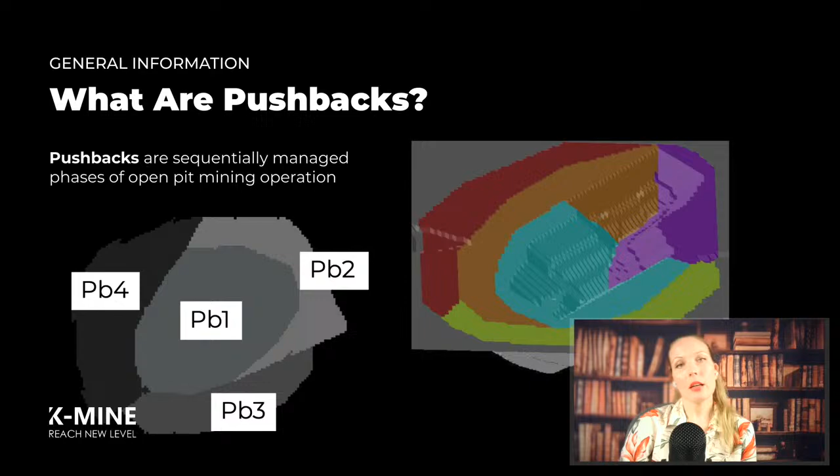Pushbacks allow for managing the intensity of mining across different areas, coordinating efforts over time. A pushback represents a controlled phase of pit development, ideally made up of unique adjacent volumes that can be mined with the current equipment while respecting practical geometric limits. Generally, pushbacks are mined sequentially, and once overburden is removed, equipment shifts to begin stripping in another area, ensuring timely mineral extraction.

So if you're wondering why, and what's the difference—we've been doing this for ages, it's been working fine—let's compare how different mining methods impact operations, intensity, and other factors. First, let's clarify what we mean by conventional mining. This involves progressive pit development where there isn't a clear mining front, but rather multiple mining zones influenced by specific mining conditions. Sometimes there might be a direction to the mining operations, but it wouldn't qualify as pushback due to the mining approach. With pushbacks, a cut is made to a specific width from the pit top and is mined progressively downward until reaching the maximum feasible depth.

Each pushback must extend the pit's depth at its lowest point, giving the entire pit a defined direction in its development. So let's talk about how conventional mining stacks up against using pushback and how these methods impact mining operations.

If you go with conventional mining without pushbacks, you get some nice benefits. For example, you have access to most of the mining faces at the same time, which means you can mix and match minerals to keep up with what the processing plant needs. That's pretty adaptable if things change around you, and you can also adjust production volumes without too much hassle.

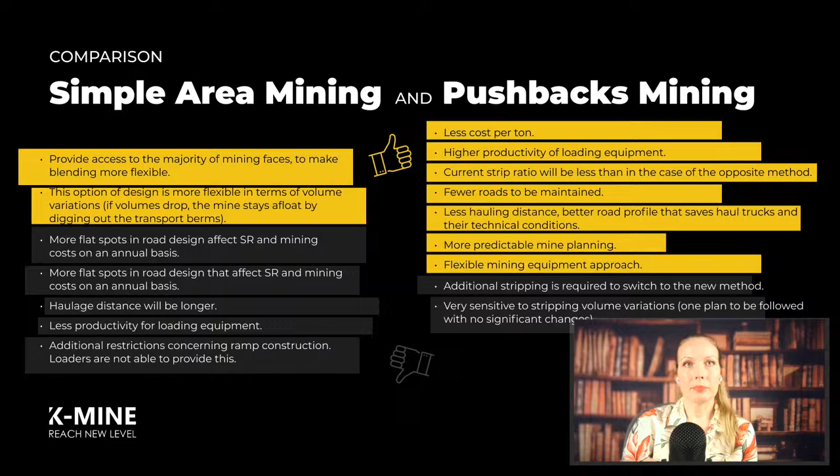So when we talk about pushback, there are some rules you have to follow when you're setting them up and building them out. First of all, each pushback needs to be made of unique connected blocks. This is key for planning pit roads, maintaining safe slope angles on the pit walls, and each new pushback should connect to the previous one, sharing transport links.

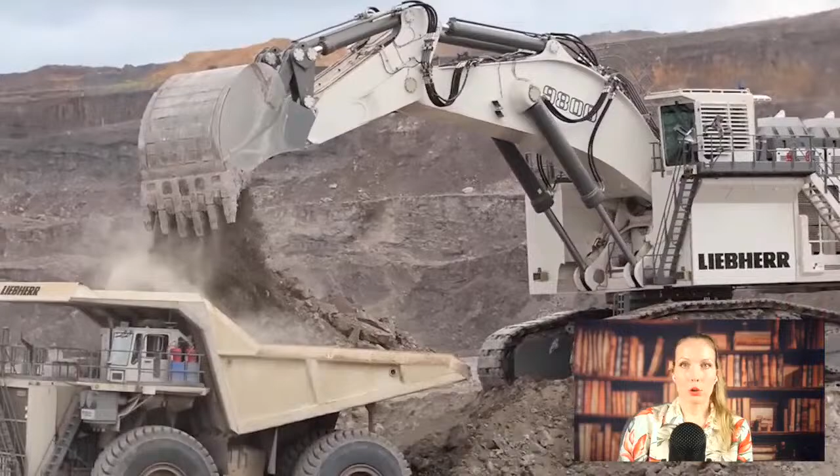Then you got to tailor the pushback to the equipment you're using. Before you even start planning, you need to know exactly what machinery will be in play, from mining to loading and transport. This ensures that your equipment can operate at its best within the pushback.

Third, each pushback should have enough of the right quality minerals to keep the processing plant running while you're opening up the next pushback. These rules also bring some limitations. Your pushback has to be manageable with the equipment you have. It needs to connect properly with neighboring pushbacks, and it must meet the plant's needs in terms of both quality and quantity while it's being mined out.

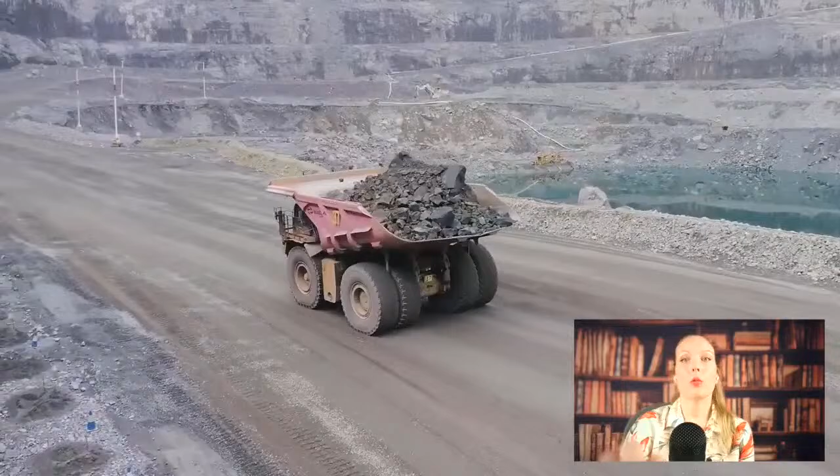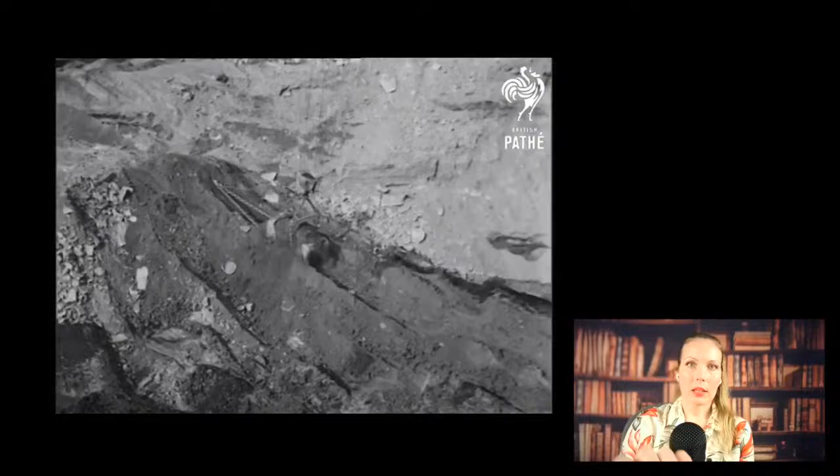So let's take a little trip back in time to see where pushbacks in open mining just came from. The idea of pushbacks really took off with the growth of mine development planning, especially in those massive quarries where managing resources efficiently and cutting costs was key. In the early days, it all started because people realized they needed a smarter way to use space in mine development. You start seeing the term pushbacks in technical reports and research around the 40s and 50s, when quarries were getting bigger and there was a push to optimize everything.

Then in the 60s and 70s, pushbacks became more popular thanks to new computer technologies, and this allowed for modeling different planning scenarios considering all sorts of variables like geology, mining conditions, and how much you're producing. This was also when powerful software started popping up, which really helped with planning, including how to develop pushbacks.

It was around this time when we started using mathematical models to fine-tune pit planning. Understanding how materials behave and being able to predict it accurately meant that pushbacks became a go-to method for big mining companies like Rio Tinto and BHP, who were at the forefront of adopting these technologies.

Fast forward to now, and pushbacks are all about high tech and complexity. With the advent of computer technology and geographic information systems, we can plan even with more precision and efficiency.

So the evolution of pushbacks has gone hand in hand with advancement of mining engineering, tech, and computing, making it an essential part of strategic planning in the mining industry today. Let's check out some examples that really make a case for using pushbacks in mining.

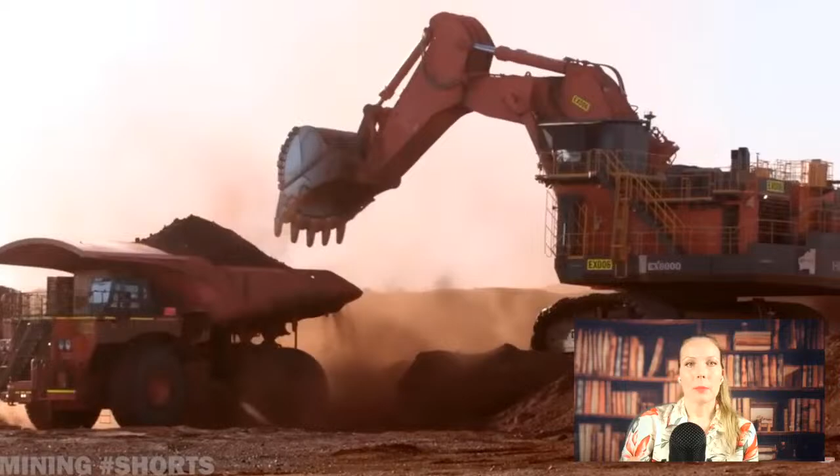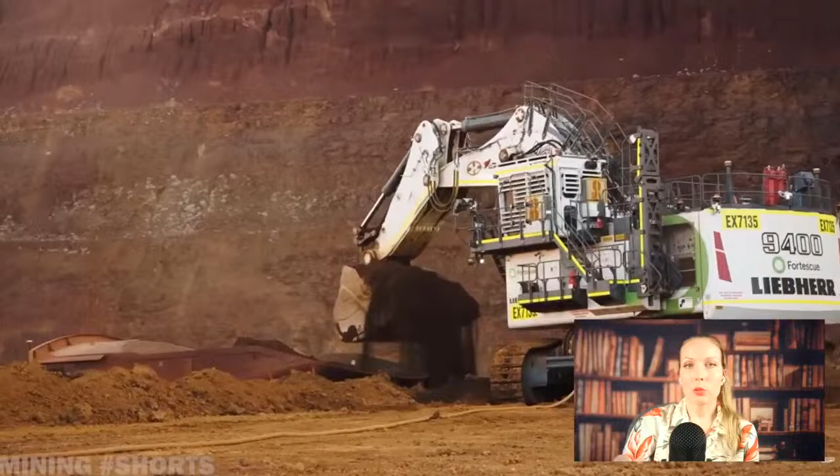BHP, another giant in mining, employs what they call the wave method in the Australian iron ore mines, especially in Western Australia. Using pushbacks here has allowed them to get the most out of the mines by mining in stages, each optimized for economic efficiency. This approach has lowered energy costs, made material transportation more efficient, decreased harmful emissions, and given them a stable production rate, reducing the risk of big financial hits if market prices for metal products swing. Advanced computer models have helped them forecast production and cost more accurately, which has been great for their bottom line.

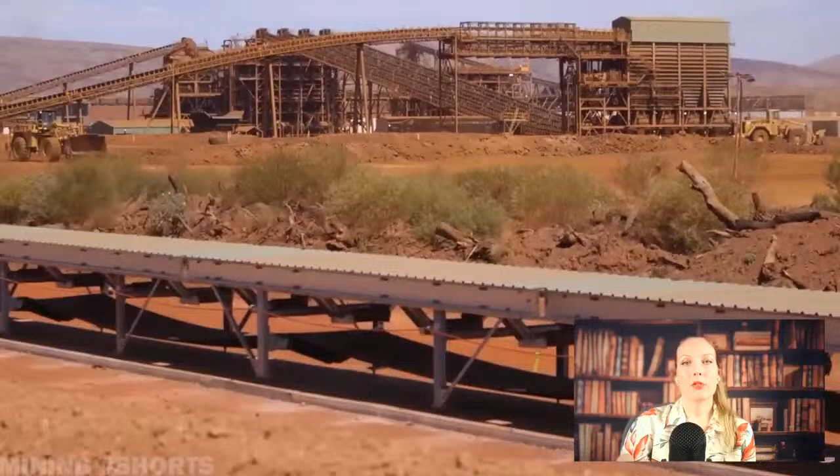These cases show how pushbacks can transform mining operations, making them more efficient, cost-effective, and environmentally friendly.

And now joining us, a mining consultant and a professor at University of Mines and Technology in Ghana, and also assistant professor at Queen's University in Canada, Dr. Bright Afum. Bright, nice to see you, and happy that you found the time to join us. Yes, thank you very much. Nice to see you again, Anya.

So talking about pushbacks and how effective they are, what do you think about it in your personal work, and what do you think are the key elements of effective pushback?

So in talking about pushback, I think we should also mention cutback. Pushback and cutback are actually different, but we use them interchangeably. Pushback refers to expanding the pit, getting more areas outside the pit into the pit, but following or using the already existing peripheral parameters like the bench height, the bench width. You maintain everything and you push it back. But in cutback, it's the same thing, but you have the flexibility of changing the parameters, and therefore the name applies as cutback, where the parameters change. If not, it's pushback. Because I teach students, I'm always particular about the terminologies.

Now let's see how pushbacks are made in K-Mine software. We'll begin with the easiest way, automatic construction, where the computer does the heavy lifting for you. We've embedded some unique features into our algorithm to find the best pushbacks, considering several extra parameters.

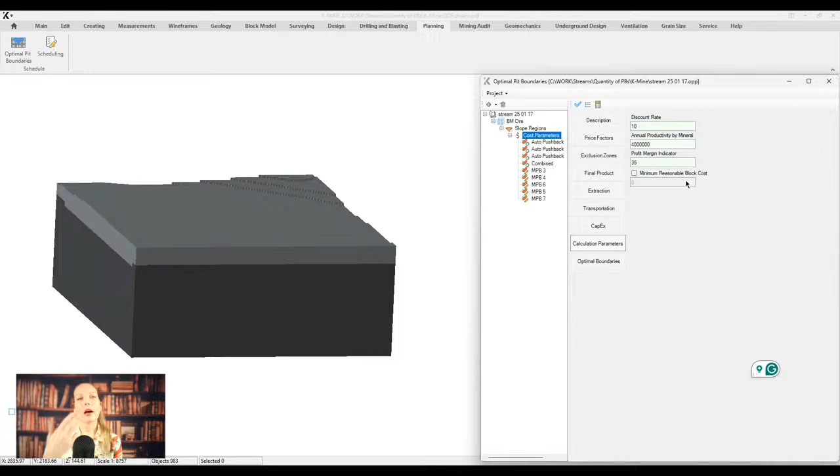First, you need to calculate a project for the ideal pit outline. Based on that, we can generate as many pushbacks as needed. For example, let's say we've made a project and plugged in various data like cut-off grade, extraction rates, how stable the pit is, and the mining costs. After doing the math, we get a set of final contours adjusted by what we call the price adjustment coefficient.

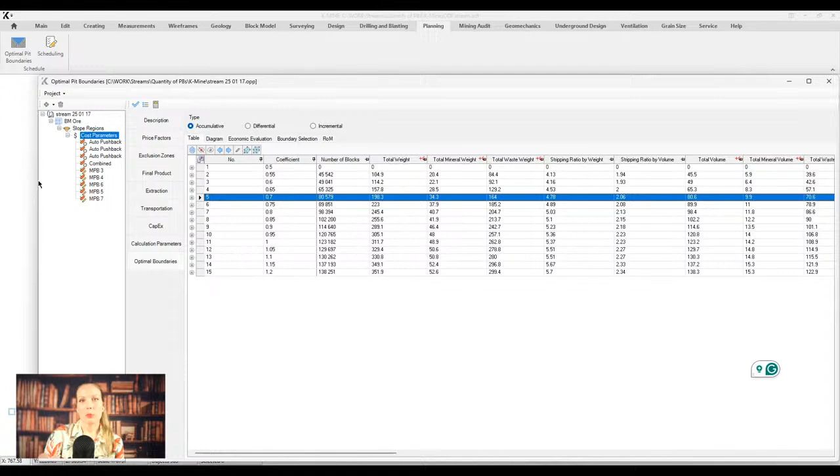The report is pretty thorough, painting a near real picture of mining operations with plenty of indicators and graphs for a first look. Each set of these block results can be viewed on its own, allowing you to explore how volumes grow as the product price goes up. This helps in deciding the pushback development sequence, aiming to maximize NPV. For each contour, you can create a detailed wireframe, track excavation with cross-sections, and integrate geological data.

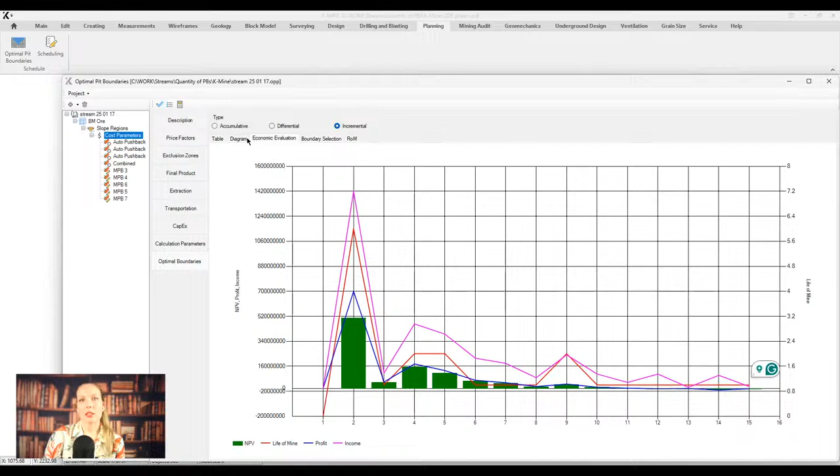For a quick analysis, we've got preset graphs that show the economic side, development timeline, and rock mass removal stats for both individual and cumulative contours. You can check this info in different ways to get a full picture. We recommend using a coefficient of 0.95 moving forward.

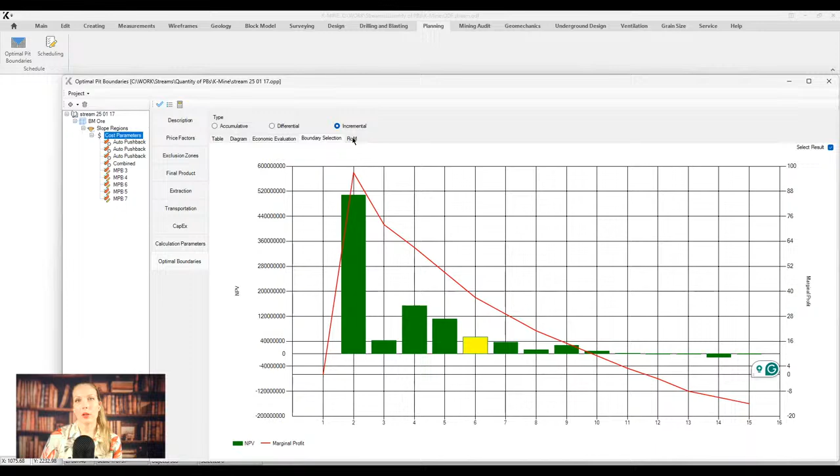In our plugin, we've set up key parameters for pushbacks like price adjustment coefficient, how many pushbacks you want, the width of the working area, minimum pushback area at both the top and bottom, plus some other useful ones. You can also set geometric and elevational limits for automatic pushbacks or direct them, but we'll discuss combined pushbacks later. Every setting is customizable for each pushback.

So now let's talk about setting up the numbers. Each pushback can have its own extraction volume and priority for different metrics. You can also add capital expenditure data to the pushbacks for a more detailed financial model. As a result, we get sets of blocks that match your desired income to varying degrees.

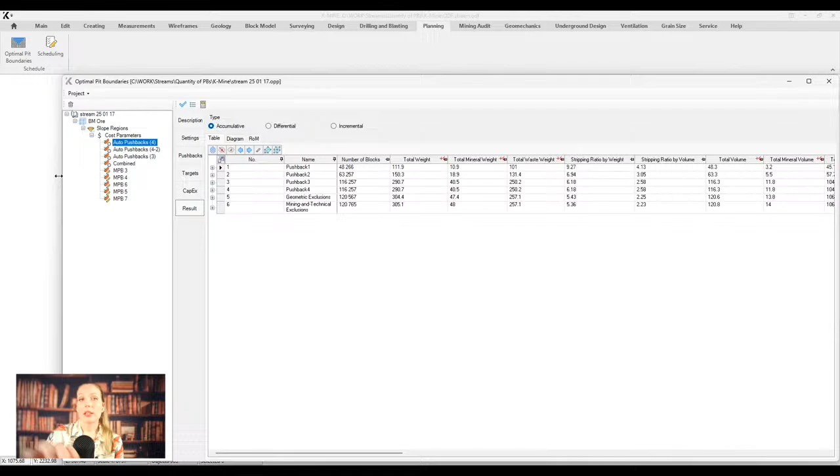You can create as many automatic pushback tabs as you need, allowing you to try different scenarios and pick the best one for further planning. You can adjust target parameters, tech specs, number of pushbacks, and all sorts of combinations. All this can be evaluated right here without needing other software. The results can then be saved in a block model for use in other parts of the software.

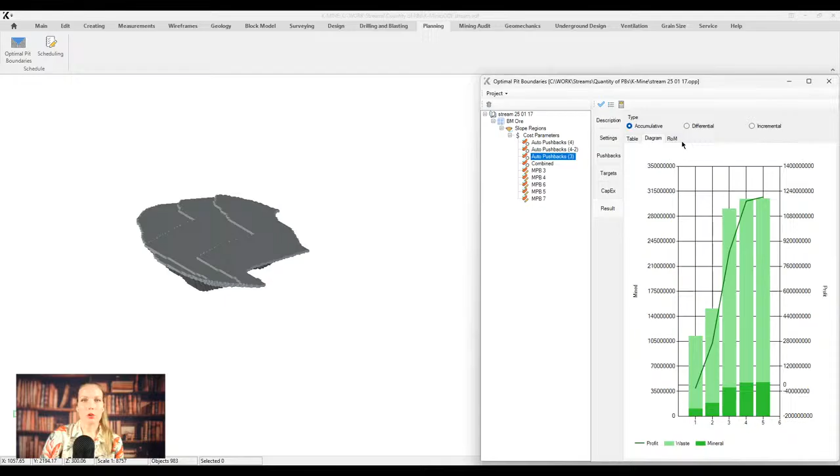So let's talk about the hands-on way of creating pushbacks. The big difference here is that the engineer has to think it through and set limits for pushbacks. Many engineers start with the automatic method to see the patterns, then switch to manual for crafting the most practical pushback shapes.

First, you decide on the coefficient you want to work with, how many pushbacks you're aiming for, and what to do with any leftover blocks. You start by choosing which layer will give you the instructions for pushback creation, and here you can pick whether to use polylines, surfaces, or solids. You define how constraints will apply inside or outside a contour or solid, above or below the topography. All these constraints can serve to include or exclude zones, and you can mix several if you need it.

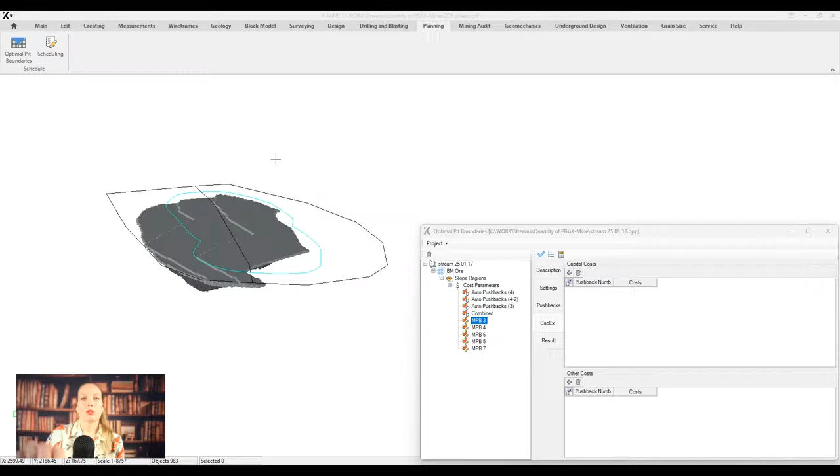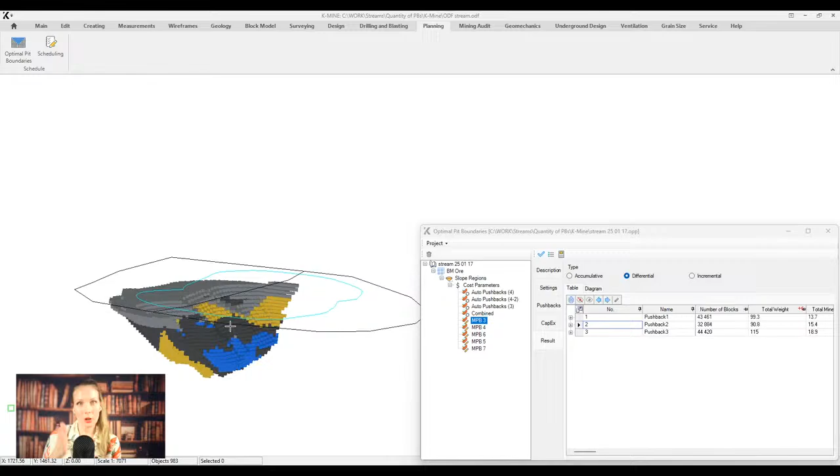Plus, you can decide whether to consider the connections between blocks calculated for angles or ignore them, which would include all blocks within the constraints. You set it up for each pushback. For instance, we've used polylines for all of our manual pushbacks. It's fine if the lines cross over each other, blocks won't count it twice, but if you're a perfectionist, you can make each new contour touch the last one, and that works too.

So let's check out what we've got. The first pushback matches the contour exactly. The second extends from the west and adds depth because we're considering block connections. The third from the east is an extension of the first at the top and deepens the previous two. The working areas at the top are exactly where we set them.

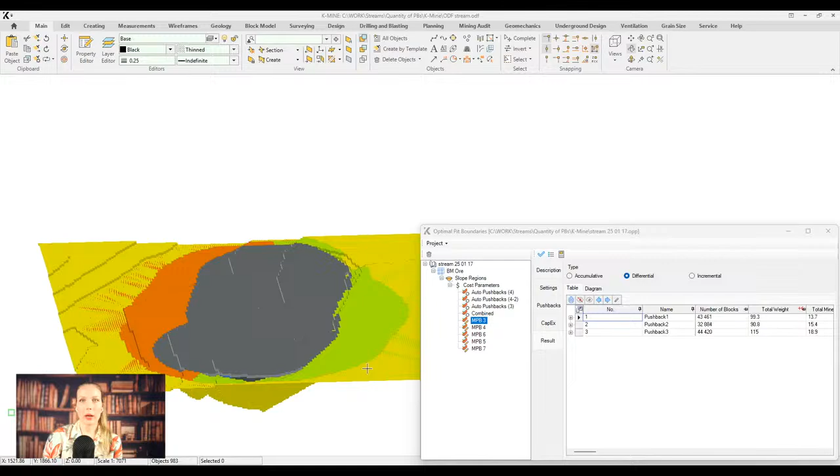Let's look at the frames resulting from pushback construction. Displaying them from smallest to largest shows the mining sequence based on our pushback designs. Just like with final contours for pushbacks, you can explore graphs and detailed tables, and notice how we've aimed for each pushback to contain nearly the same amount of ore. This is something you can achieve with several tries, even when doing pushbacks manually.

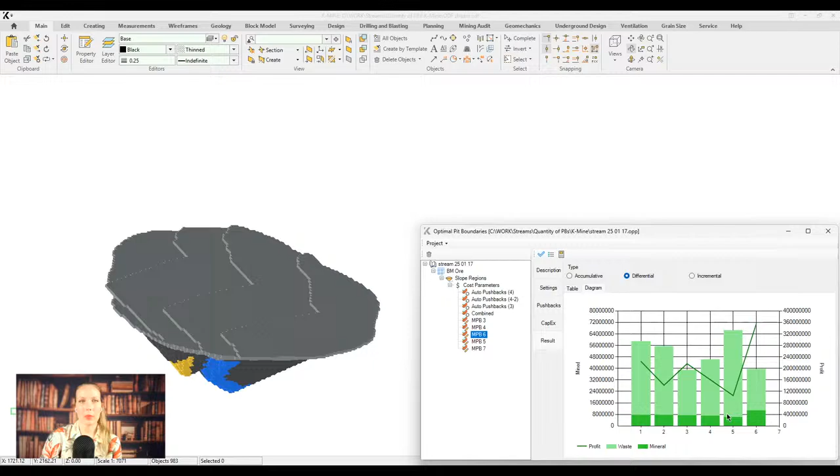We won't go into each detail, but let's quickly see how these pushbacks relate to each other. The ore quantity is kept consistent, and each pushback follows the last. It's interesting to note that with more pushbacks, the first one gets smaller, speeding up the initial ore extraction, which is crucial at the project start.

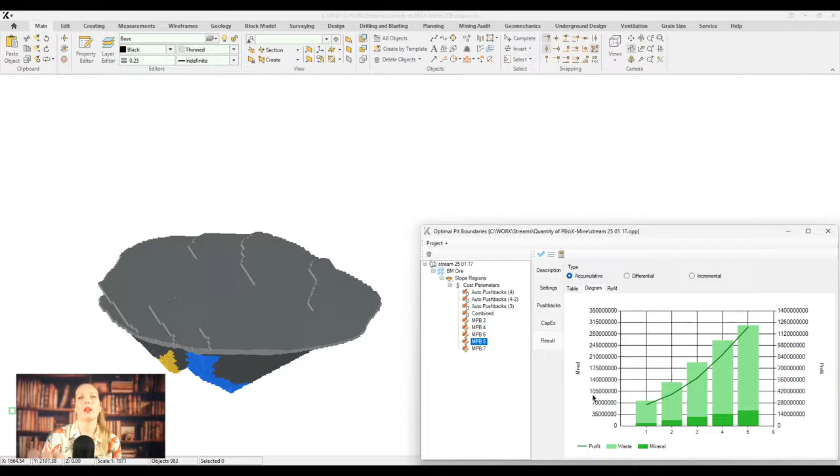For example, now we're looking at the project with 7 pushbacks. The first pushback is at the richest part of the deposit. Then the development heads south, expanding west and east over time. Each pushback is a unique set of blocks adjacent in time.

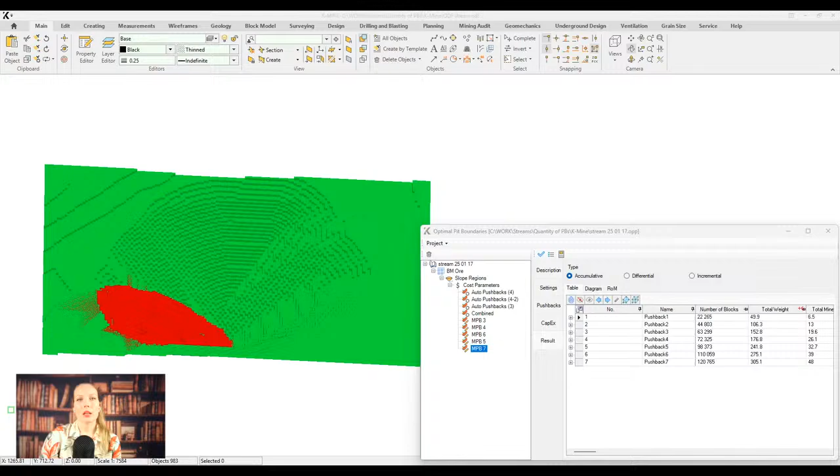I should mention how user-friendly this plugin is. Strategic planning isn't easy, so we've tried to make it as straightforward as possible. And you see, with minimal settings, you get highly flexible and customizable outcomes. It's all step-by-step, making it hard to get lost.

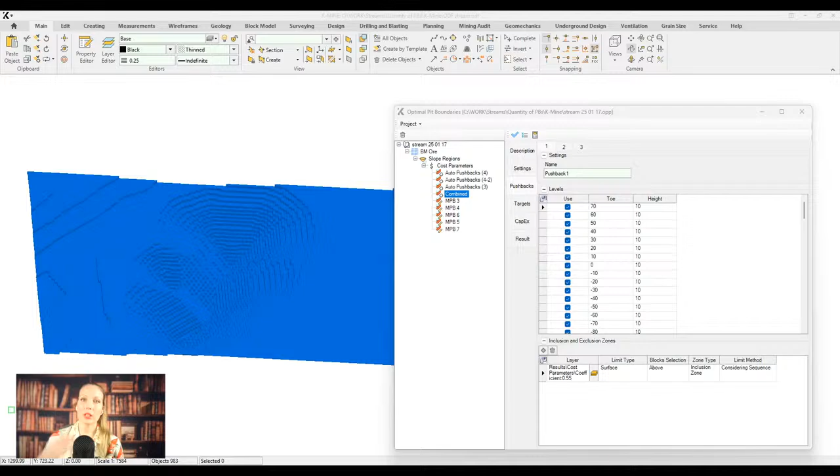Wrapping up how to create pushbacks in K-Mine, it's worth noting that besides fully automatic and manual methods, there is this hybrid approach that Bright was talking about. It's like auto mode, but with some manual tweaking. So you start an automatic pushback and then apply one, two, three, or as many restrictions as you need to refine your pushbacks. This gives you maximum flexibility and customization in the process.

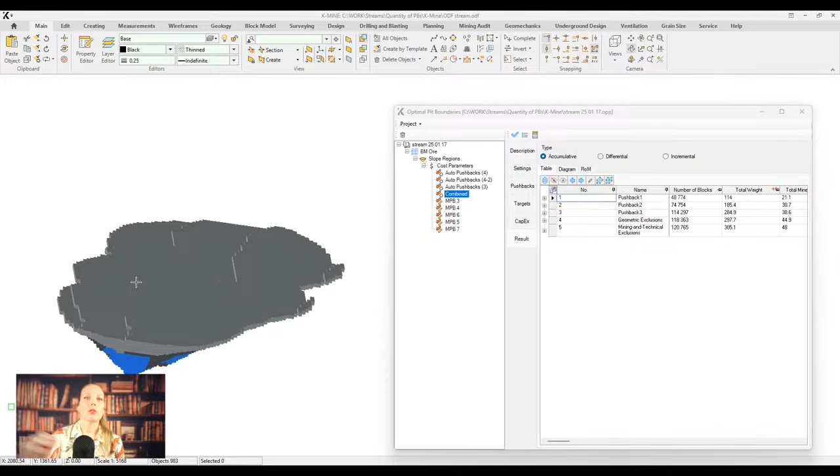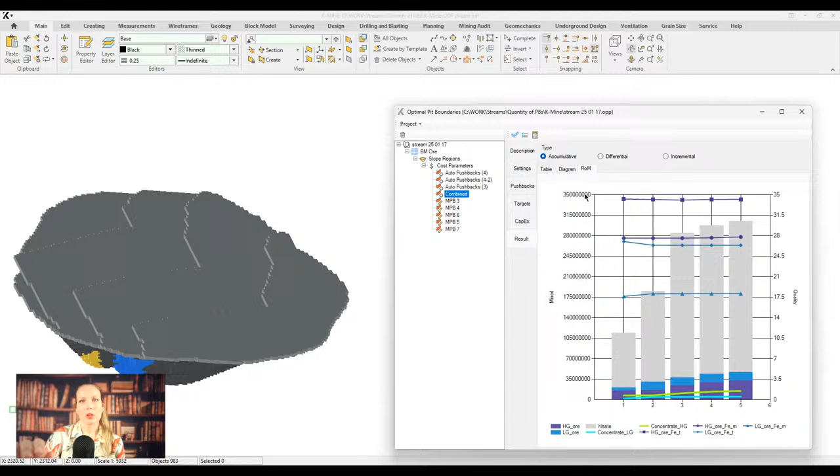For example, within the pushback restrictions, you might specify one of the wireframes that show the optimization calculation result. Then you set the target parameters for finding all subsequent pushbacks, and the calculation kicks off once you start building the second pushback, with the first one being set according to your restrictions. So you see that out of 3 pushbacks, 2 were automatically generated and 1 was manually set using wireframe. This approach is great if you want to know exactly how you want to begin, but there are still things to figure out for the next steps.

And the icing on the cake when creating pushback is definitely the dynamic design plugin that is part of our design module. If you're after the most realistic plan, your calendar schedule should include pushbacks that you design.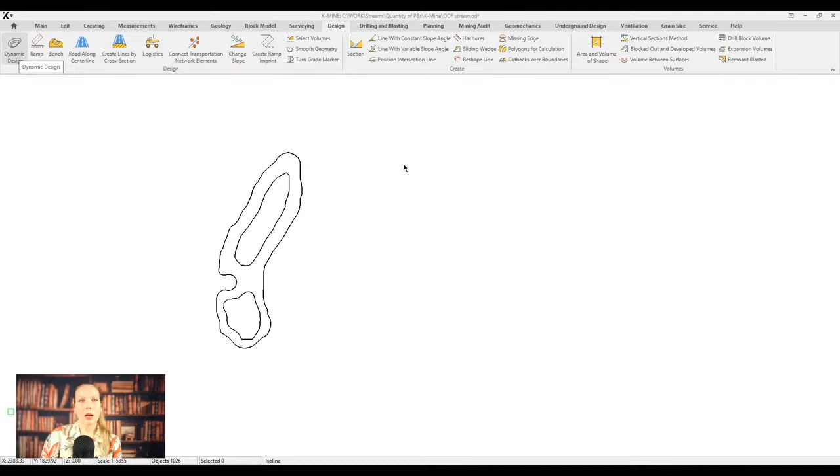Now let's see how to make a pushback project using just a wireframe. First, draw a contour where you want to get ISO lines aligned with the level list. Use the create ISO objects command to generate ISO lines you need. Then pick out the lines you want to work with. Further, in our case, it should be lower and unique, not repeating the previous elevation.

Smooth them out for easier work, and then we move to the fun part. We make a list of levels, which is super easy with automatic filling, and you just need to know your pit specifications. Then we decide which baselines belong to which level. If a line isn't at its assigned level, we project it onto that level. Then we start building the edges.

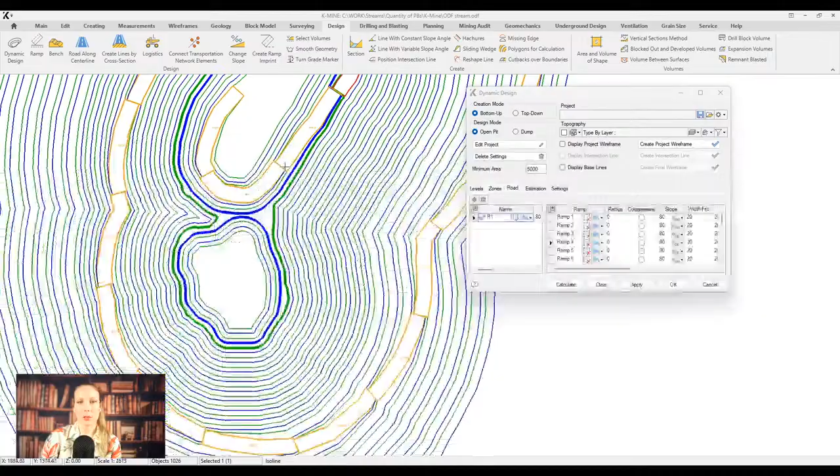We add one ramp, then another, turns, connections, and so on to make sure every part of the pit is accessible. Each section of the project must be mineable. This must be ensured at the design stage of the final pit contour, and all approaching roads must be interconnected to ensure flexibility in the transportation of materials.

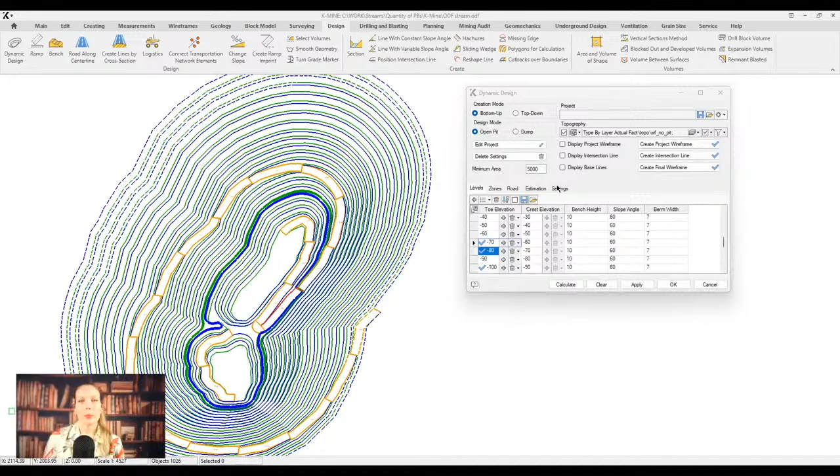Then we introduce the topography into the project and recalculate. This shows us which lines are above ground level, which is crucial because our project must intersect with the topography to work correctly. The plugin has various visualization tools to make this process as clear as possible.

Once everything is set and looks good, we construct the final wireframe. This combines two wireframes, the project and the added initial topography. In just 2 minutes, you can have a project for the final pit's contour, pushback, and other pit elements. Sure, sometimes you'll need more time, but it's much faster than manually designing bench by bench.

And this plugin isn't just for quarries, you can use it for designing dumps too.

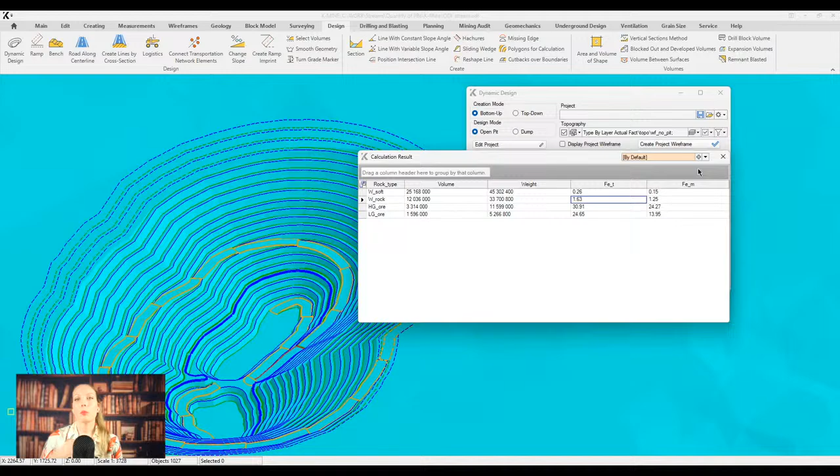So to wrap up, here's a sneak peek for the next update. Our dynamic design model now includes volume calculation functionality done in the most user-friendly and quick way possible. And you can calculate volumes considering level lists, which make document preparation just a breeze. Plus, we'll soon add the ability to visualize the part of the block model that's being calculated.

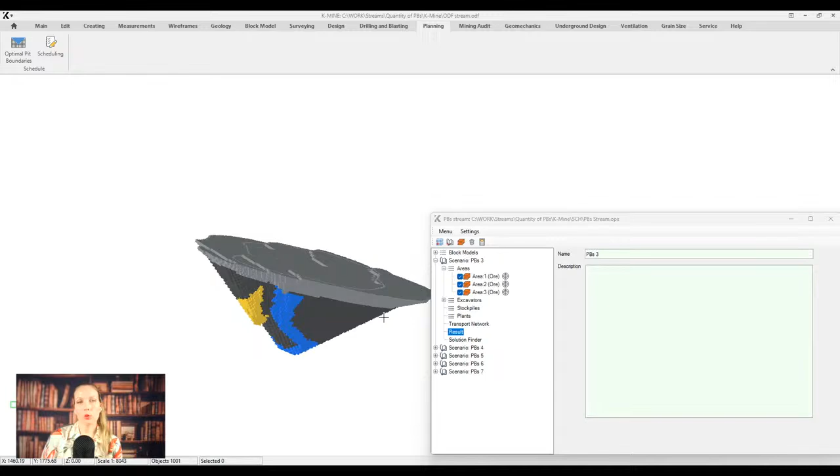So let's dive into calendar planning. First of all, our schedule model is great for long-term, mid-term, or short-term planning. Its strength is in how easy it is to use and how much you can customize it. The plugin lets you calculate mining sequences either automatically or by hand.

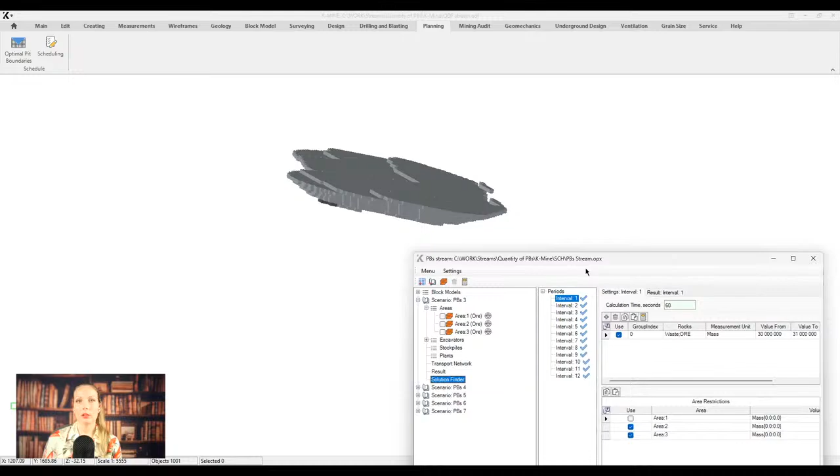We've set up 5 scenarios with different numbers of pushbacks. To keep it real, I'll say up front that these calendar plans aren't perfect, and that's the point, to show what actually happens with different pushback counts. All site parameters are the same across all scenarios to avoid skewing the results.

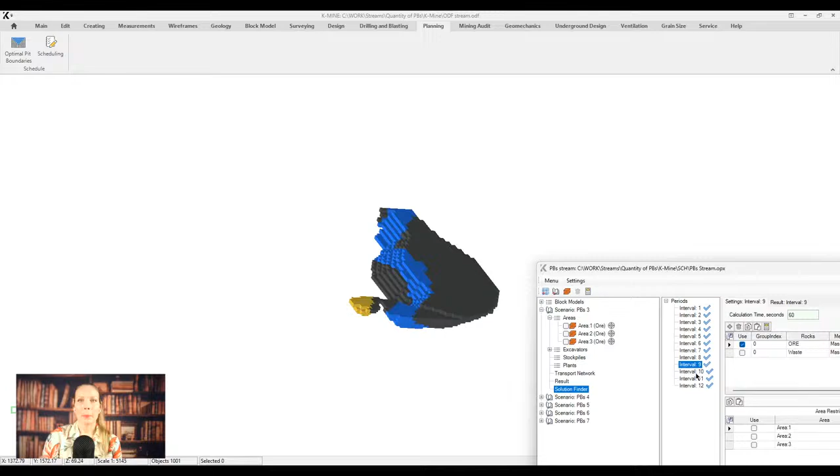And to achieve our goal, it's enough to run the calendar plans in auto mode. The target for ore is constant, but overburden varies because of pushback size differences. We've set a hypothetical pit productivity limit of 30 million tons of rock mass per year. For ore, we're looking at 7.2 million tons annually over 12 years of operation. Once calculated, we get sets of blocks showing the mining schedule over the development method.

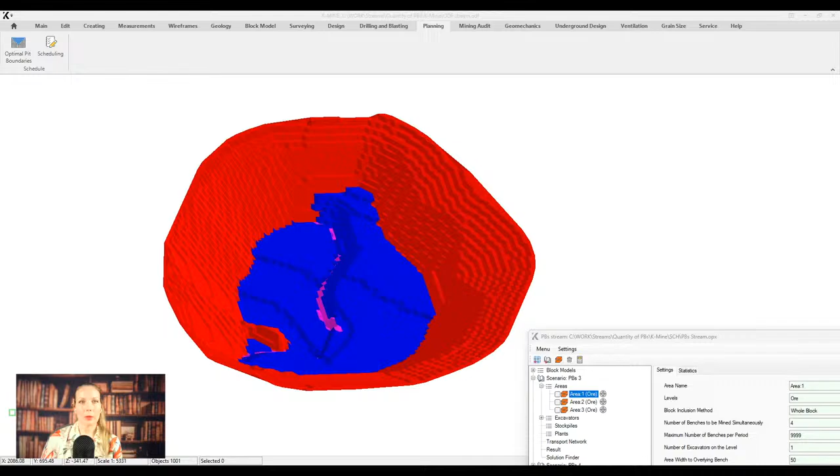Towards the end, we'll lower production to reflect a more realistic scenario. We suggest using wireframes for outputs similar to pushbacks, where you can load and display them sequentially to see the development timeline. The core of planning here is to open one pushback, mine it, and then move on to the next at the right time.

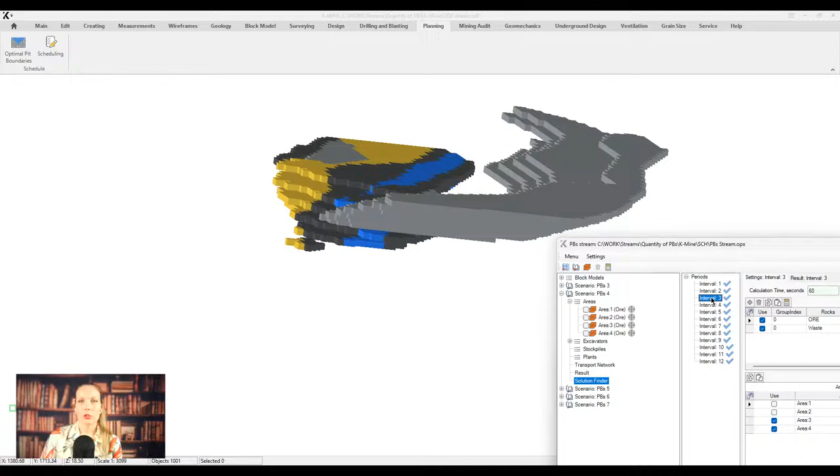So let's look at the results for a scenario with 4 pushbacks. Just looking at the extraction blocks won't give us much insight, so we'll soon switch to a more detailed table analysis. So for a quick example, here's a manual calculation.

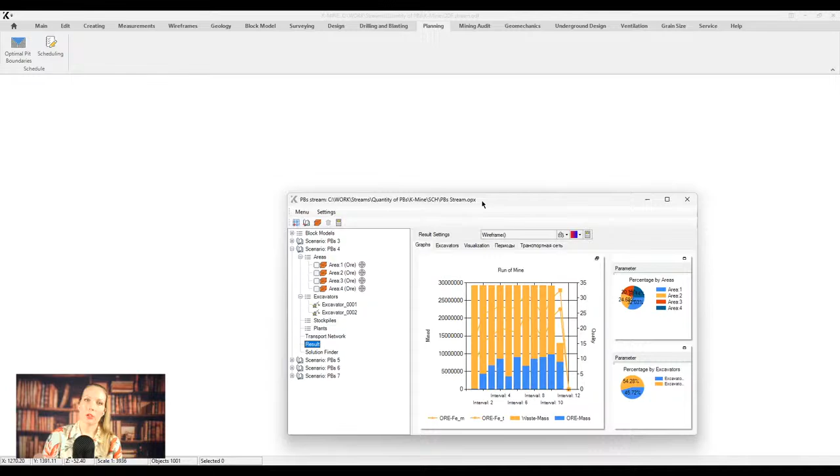We're using 2 excavators. One stays on a site until it's fully mined out before moving, while the other shifts in a bit earlier to set up the next work front.

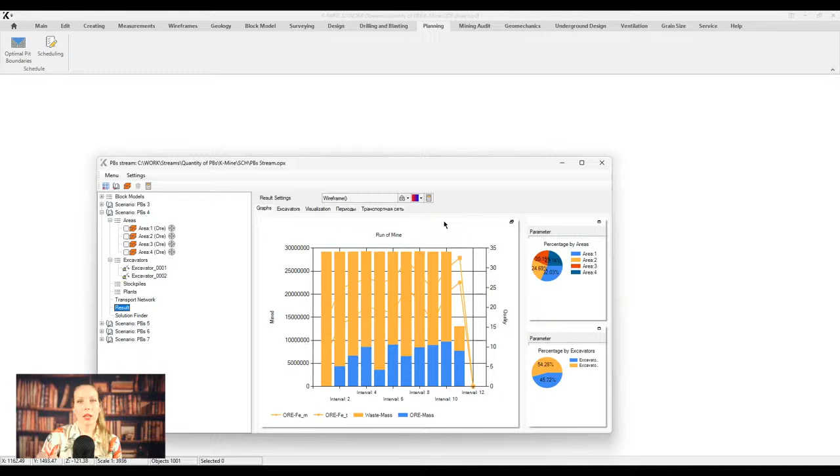After manual calculation, we've prepped schedules to help make further planning decisions. And with manual calculations, you can monitor where the mining phase is each day of your plan, regardless of the planning intervals. Manual planning also opens up additional features like calculating the transport distances for rock mass.

So now let's get into analyzing the data from our planning process. The key takeaway here is that the fewer the pushbacks, the harder it is to reach the ore because you're dealing with a lot more overburden. Sure, you can smooth out the volumes over time and start on the next pushback sooner, but with 3 pushbacks, we see some big spikes in overburden that might not be achievable, because the ore targets are met only from the 4th interval.

With all that overburden early, there is a dip in the net present value, and we used economic indicators similar to those in our deposit optimization project.

So with 4 pushbacks, there is still some excess, and there are spikes, but the spikes are not as high and the NPV improves a bit. The schedule starts to look more doable, suggesting that with more time we can average out the workload.

When we plan with 5 pushbacks, the spikes are even less pronounced. The NPV is higher, and everything seems to be going according to plan. Likely by moving some overburden earlier, we can tackle these issues.

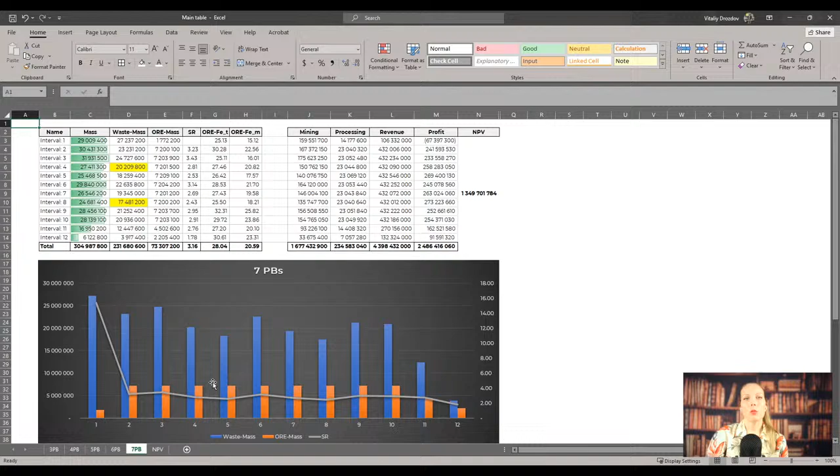When we have 7 pushbacks, the overburden volumes are pretty stable, no big swings, since each pushback is smaller with more of them. It looks promising with the highest NPV, but the real-world feasibility might be a different story, more related to pushback design.

Finally, we look at the graph focusing on NPV, which clearly reflects the economic impact of long-term planning. As expected, fewer pushbacks mean a lower NPV, and more pushbacks mean a higher one, and we've discussed why this happens. It's also worth noting that adding 1 more pushback after the 6 doesn't significantly affect the NPV, but adds complexity to the design, possibly making it unfeasible.

So considering all factors, it seems 6 pushbacks is the sweet spot for these conditions. If not possible, 5 pushbacks could work with extra focus on early development stages.

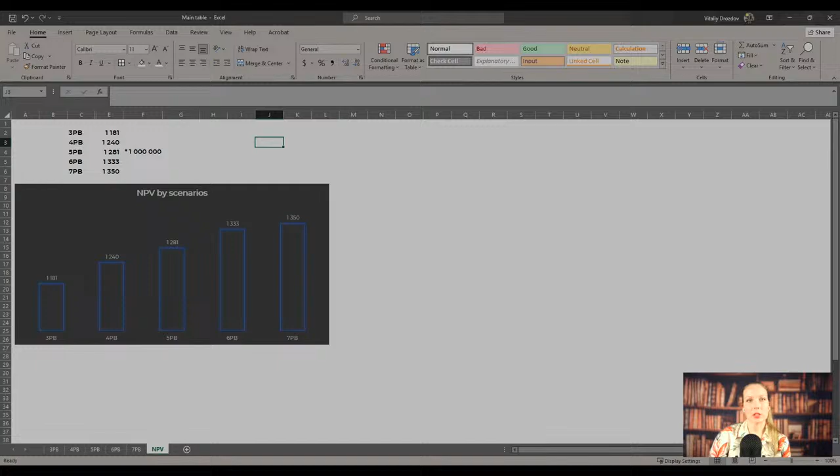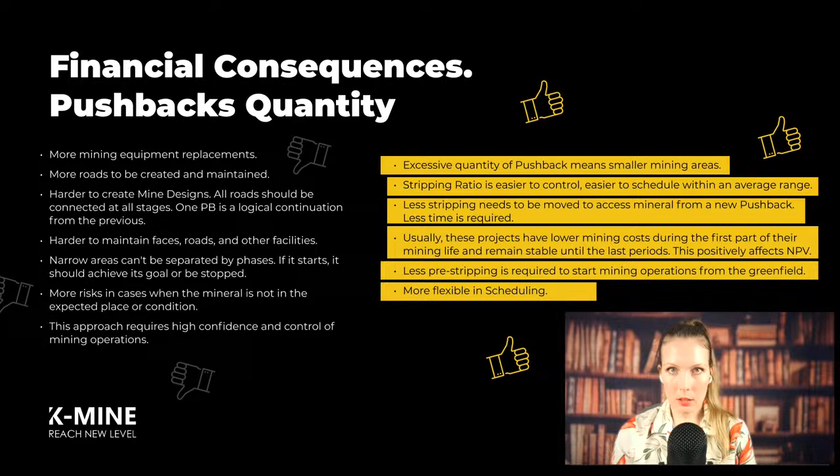Here's another slide worth tuning into for the streams. We've tried to sum up the key points about what happens when you have too many pushbacks, although our analysis shows that more pushbacks can be beneficial. What's good for a higher number of pushbacks is bad for a fewer number of pushbacks, and vice versa.

So here's the deal. Smaller pushbacks get worked through quicker, leading to more excavator moves, which can reduce potential productivity. More roads mean higher construction costs and more time spent. Another big issue is that with smaller pushbacks, you might run into unexpected problems like stability issues or geological surprises, which could halt the process and hurt profitability for a while. Narrow pushbacks mean higher risks.

On the positive side, it's easier to plan and execute mining with more pushbacks, and the relatively smaller overburden allows for working on multiple pushbacks at once if needed. Projects with more pushbacks tend to be more economically attractive, and each point we've discussed has an impact whether on the economy or on the risk of executing the plan.

So what affects the size of a pushback? First of all, it's the size of the deposit. The bigger it is, the larger you can make your pushbacks.

Then there is the size of your mining and transport equipment. It's wise to make the pushback width a multiple of several working areas of the equipment you'll use. Of course, you've got to consider the stripping ratio and how much mineral of the right quality you need. The amount of exposed mineral should keep the plant running smoothly and give you time to open up the next section.

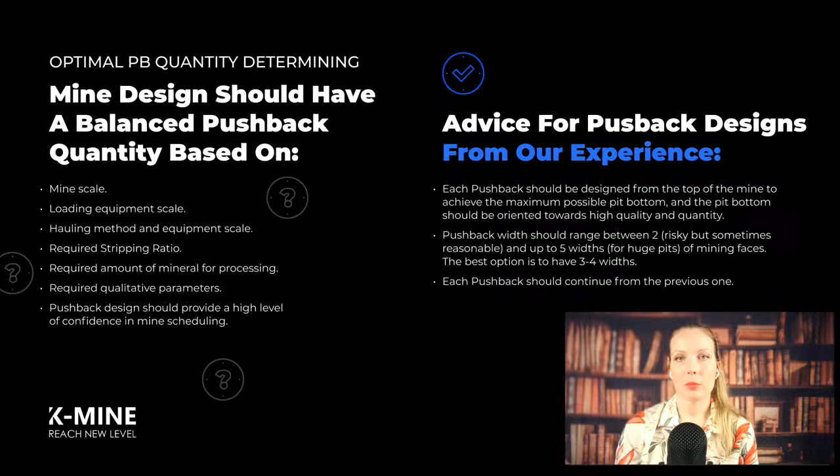Use these tips and remember, the goal is to start developing each pushback as late as possible, but reach the mineral as quickly as possible. That's the secret to successful scheduling when using pushbacks.

All right, so to sum up what we've covered today and how to apply it. First, every deposit has its own quirks, so each one needs a unique strategy, but there are some general guidelines you can follow that will help you with strategic planning across the board.

Take advantage of the benefits that different pushback widths offer when they make sense for your situation, but always be mindful of potential downsides. Then, when it comes to calendar planning, using pushbacks usually yields better outcomes and improves its value. Also, no mining operation can succeed without the right people to carry out these strategies.